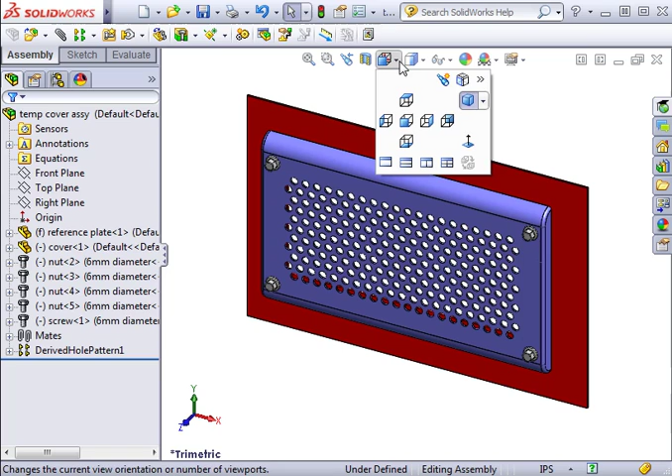But in order for this to work, you do have to first create your smart components. However, it's not that difficult, and if you've already used the components in an assembly, most of the work is already done. Take a look at this assembly. I have a perforated cover mounted onto a plate with a corresponding cutout, all fastened together with screws and nuts.

If this were a cover assembly I use frequently, it would be well worth converting it into a smart component. To do this, I'll select Make Smart Component from the Tools drop-down menu.

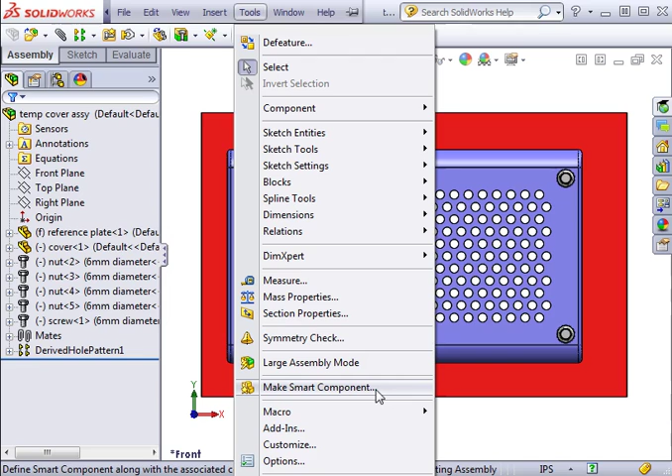Or to add the Smart Component icon to your toolbar, select Customize from the Options drop-down, navigate to the Commands tab, select Assembly from the list of categories, and then drag the Smart Component icon onto your toolbar. You can now access the tool from here.

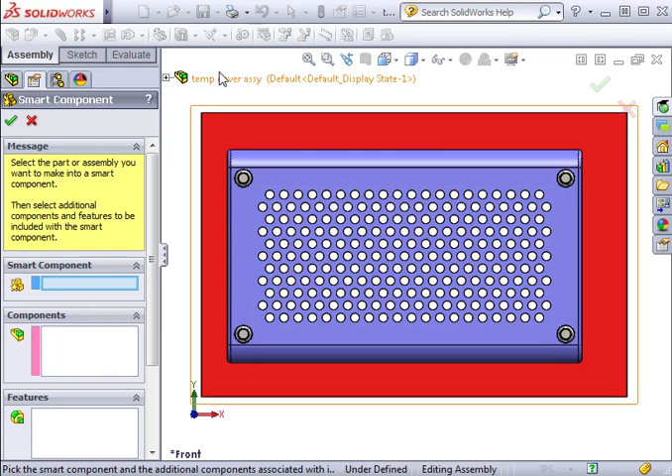In the Property Manager, I'll select the cover as the Smart Component. In the Component Selection window, I'll select the screws and nuts. These selections can be made either in the Graphics area or from the Feature Manager tree.

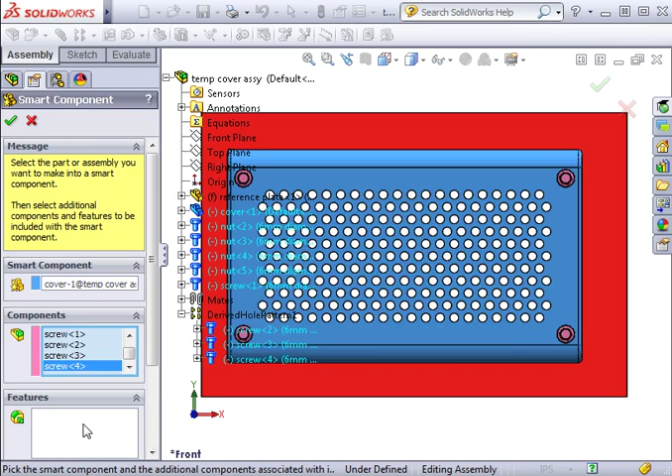When I activate the Features Selection window, notice the components I've selected so far will become invisible. This makes it easier to select features such as the cutout and the holes I have here. If you did want to see the components, just click the Show Components button and they'll come back.

I'll come back to the auto size option in a later example. For now, I'll click the Configurator Table button here at the bottom. This table lists the smart component, the cover in this case, as well as the other components you've selected. It allows you to specify which configuration of each component should be used with each configuration of the smart component.

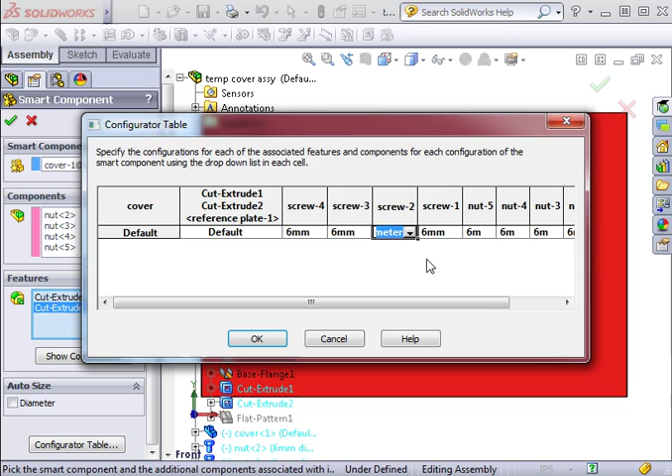I only have the default configuration for the cover, but this table can be quite powerful if your smart component requires different size hardware or size cutouts for each configuration. For now, I'll cancel this table and click OK to complete the smart component.

At this point, there's little evidence that anything has happened. However, if you look at the Feature Manager tree, you'll see the icon next to the cover has changed. If I right-click on it to open it, you can see a new folder was added to the Feature Manager tree called Smart Feature. Inside these folders are 3 other folders.

One contains the features I selected, one contains the additional components, and the last one contains references necessary to properly position components in an assembly. An important detail here is that the smart component information resides within this part file, not at the assembly level. Once I save this part, the assembly I used to create it will no longer be required.

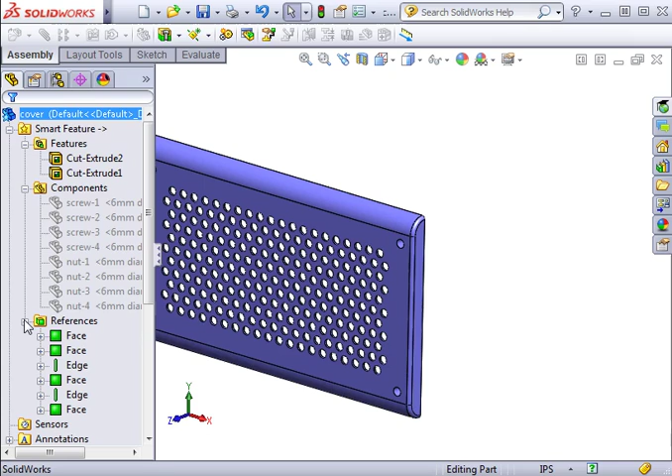If you need to make changes to a smart component, all you need to do is right-click the Smart Feature folder and select Edit in Defining Assembly.

When you do this, SOLIDWORKS will create a new temporary assembly that is generated using the information contained within the smart component. Here you can edit the definition of the smart component by clicking the Edit Definition button to bring up the Smart Component Property Manager.

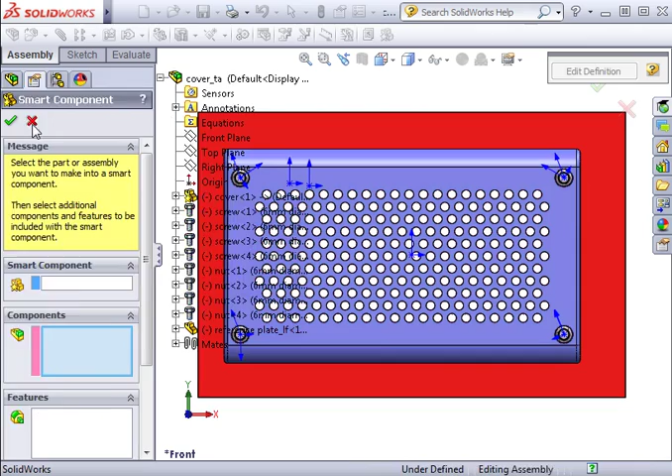Once you're done making changes, save and close the temporary assembly, and the changes will be updated and stored in the smart component.

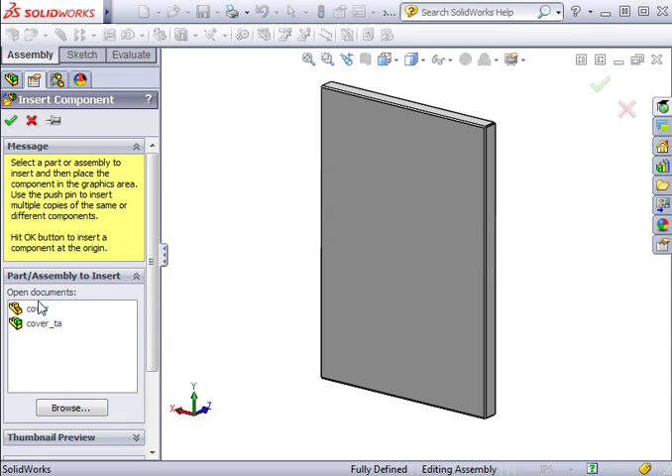Once you create a smart component, you can add it to any assembly just like a regular component. I'll add the Cover Smart component to this assembly, and I'll use Mates as usual to position the cover.

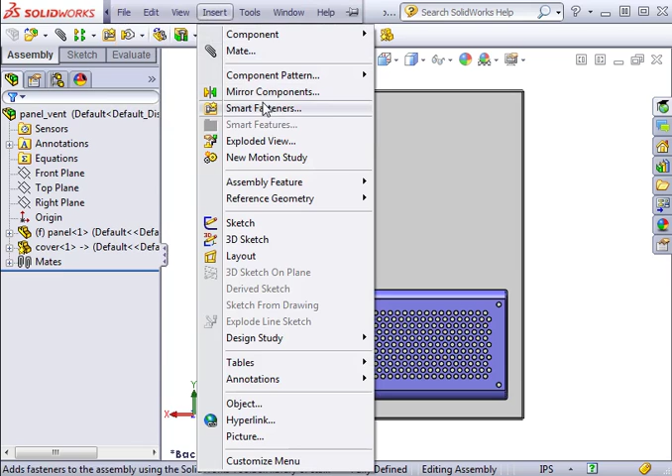To enable the Smart Features stored in this component, you can use the Insert drop-down menu and click Smart Features, or you can right-click the cover in the graphics area and select Insert Smart Features. Or you can select the cover in the Feature Manager tree and click the star icon that shows up in the graphics area.

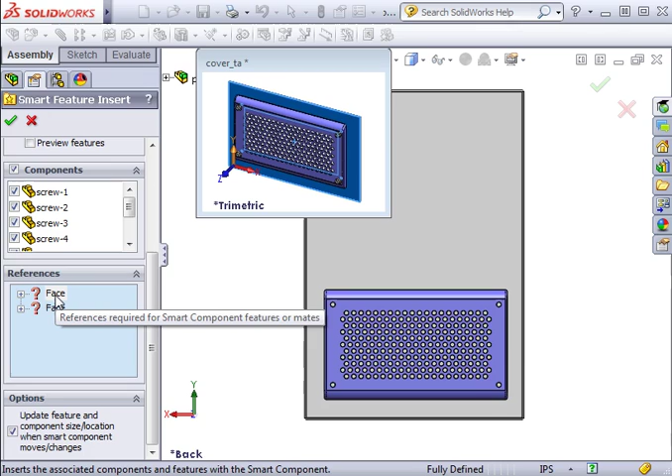To complete the Smart Features, you simply have to satisfy the references shown in the References selection window. As you select each one, the preview window will show you the reference required. In this case, I'll select the front of the panel for the first reference and the back of the panel for the second reference.

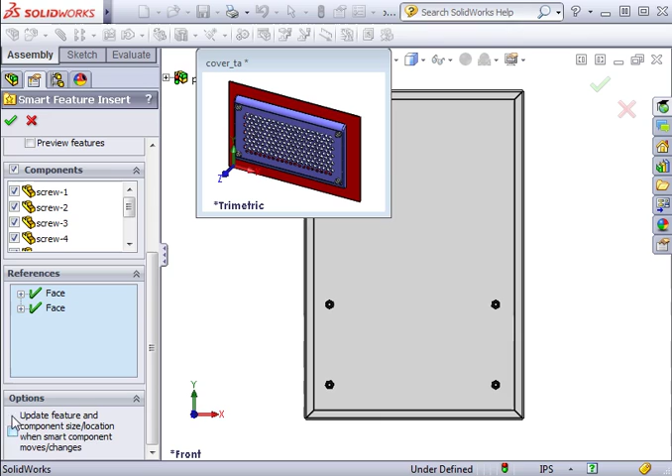Once these are satisfied, you have one more option here at the bottom. This controls whether you wish to have features and components update if you were to move the Smart component. I'll leave this unchecked and click OK to complete the Smart Features. You can see the screws, nuts, and necessary cuts were automatically generated.